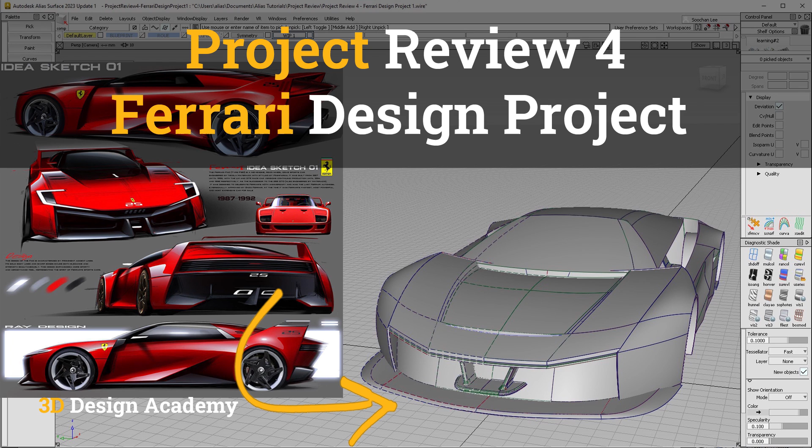In this video, I will be doing a project review and provide recommendations to improve the model. Now, this is the model that I'm going to be dissecting today. It is a project by a student. It is based on a sketch, so I'm guessing this is probably a student work. So let's dive into it.

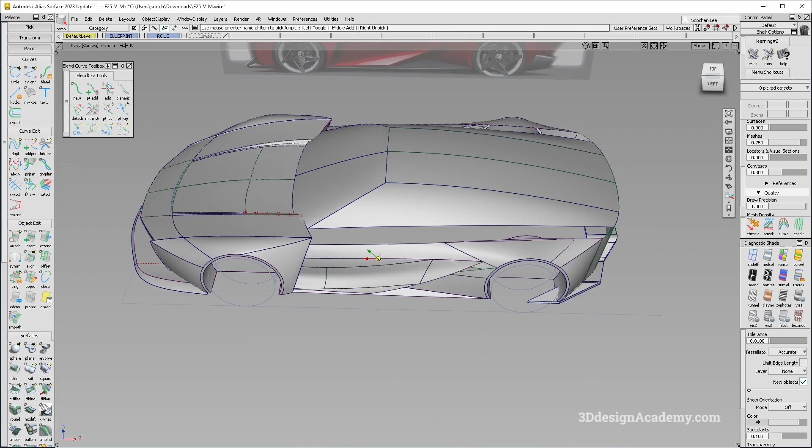Now, because this is actually not based on a production vehicle, I'm going to take some design liberties in order to improve it. The process is still very similar. You still want to clean up the surfaces, make sure that everything's good. So let's just go through it one by one.

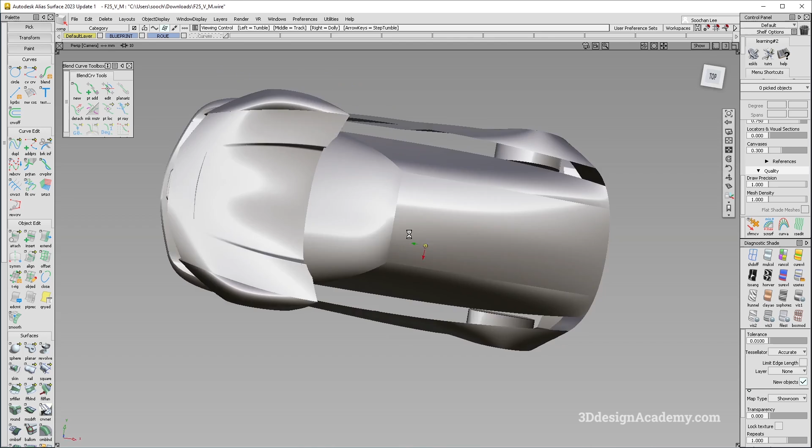Okay, so the first thing that I noticed is the reflection and the upper. So if you see this over here, you'll see that there's a slight peak over here, and also of course the windshield has a little bit of bump. So let's go ahead and fix that.

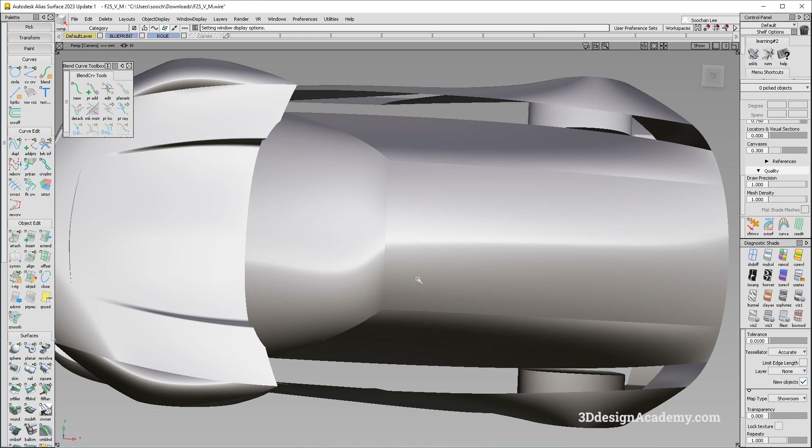Now when you're doing a model like this, you always want to build across the center, especially surfaces like these, because there are a couple of reasons. First of all, if you build across the center and you make sure that it's symmetrical, you're going to ensure that there's no peak in the middle. I mean, this one doesn't have a peak in the middle, which is good. And also, it's always going to be G3.

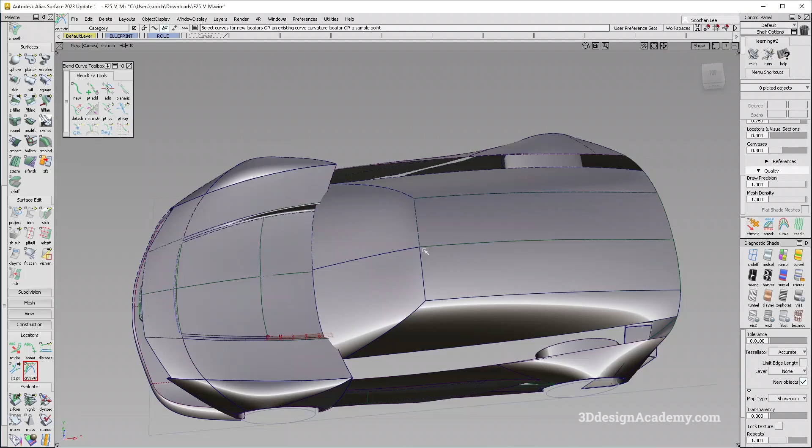Now, if I grab a curvature comb like this, you'll see that there is a little bit weird peak over here. And if you just click on this, yeah, there's something going on. So you always want to build across the center. So let's go ahead and do that. So what I'm going to do is I'm going to actually try to extract some curves. I do have a curve layer, so let's see if I can just use this.

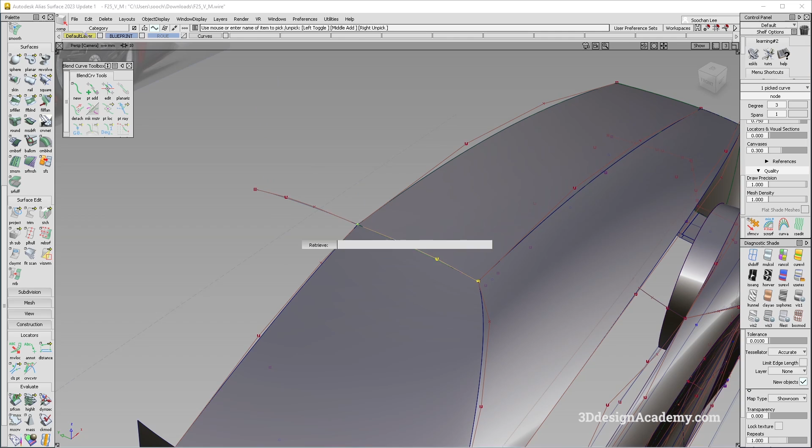All right, so the first thing I'm going to do is turn the symmetry off because it's kind of hard to build with symmetry on. And let's actually turn that off over here. I'm going to try to keep the footprint very similar, but I'm going to make some adjustments. So I'm just going to mirror this over here. And actually, I'm going to copy and paste this so that I don't mess with the original. Oh, actually, let me just do that again. So I'm just going to duplicate mirror.

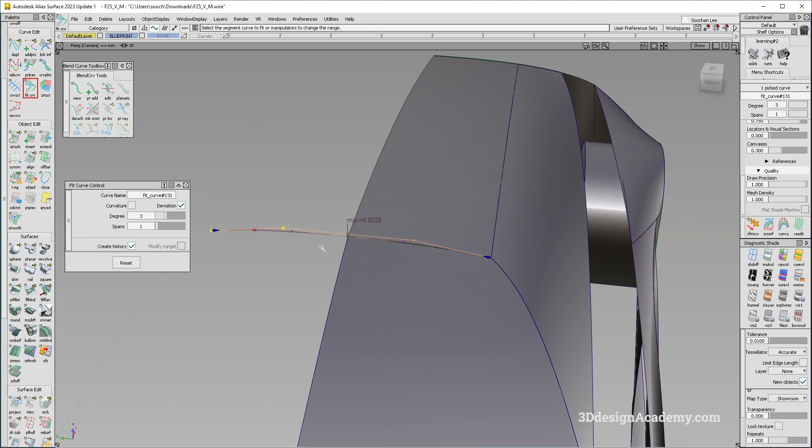And what I'm going to do is I'm just going to connect. So I'm going to say attach, connect like this. I'm going to pick here and pick here the curve like this. History, I don't care. Now I'm going to do a fit curve, and when you're doing a fit curve, if it's going across the center, you probably want to do 3. That's my recommendation. Of course, the CV structure, I think it looks a lot better. So I'm going to take that.

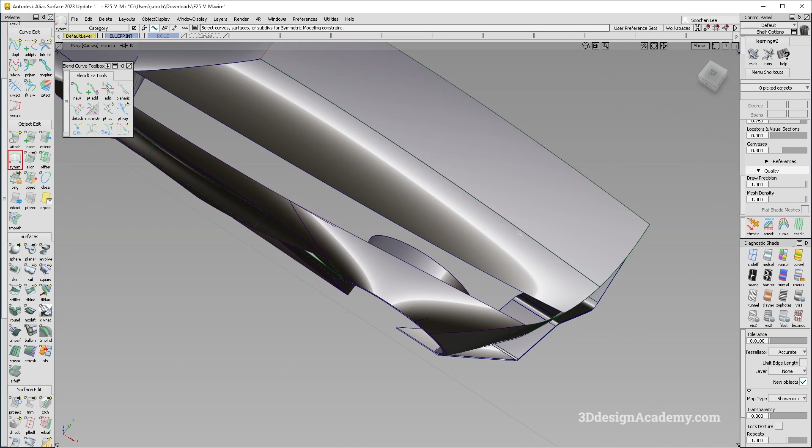Okay, so I have a curve at the top like this, and I'm just going to make sure that it's symmetrical like this. And let's go ahead and do the same thing over here. Okay, so it looks like there's no curve there. All right. So since I already have a footprint, I'm just going to duplicate some of these like this. Now, if it was like a fresh build, I would use skin, but since I already have the footprint or the surface patches sort of made, I'm just going to recycle them.

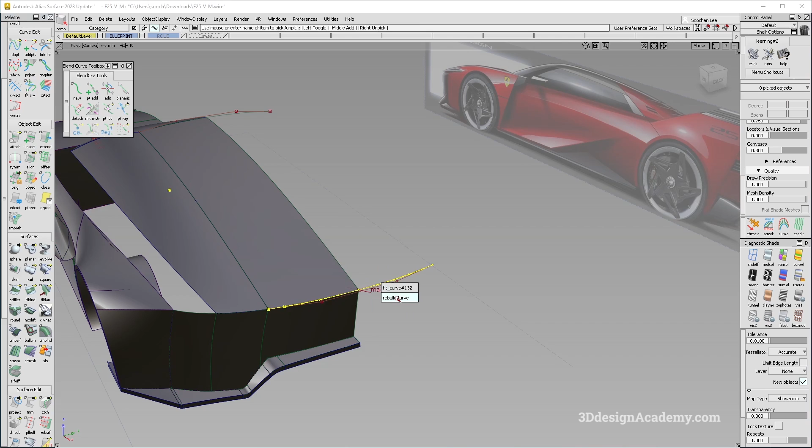So again, I'm just going to duplicate this one. Oh, looks like there's an extra curve. I don't know why. So let's get rid of that. And again, I'm just going to do a fit curve like this, and that's good. Because it is a fit curve, it is not 100% positional, but that's okay. And now I'm just going to duplicate this edge. Actually, there should be a curve, so let me just extract this. So I'm going to copy and paste, put in the default layer, and just hide that.

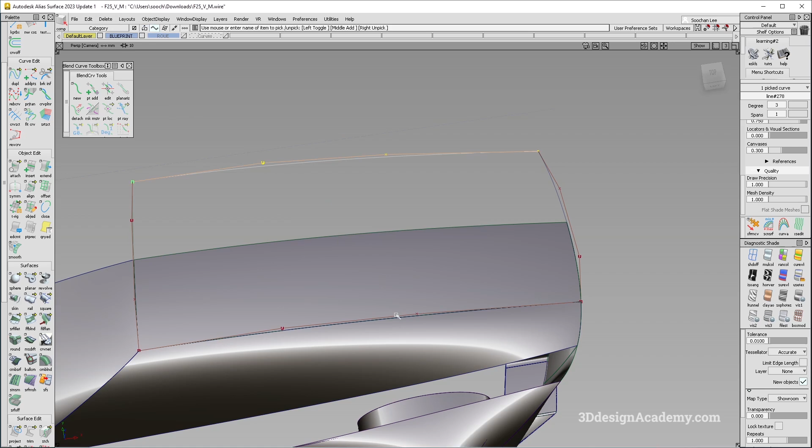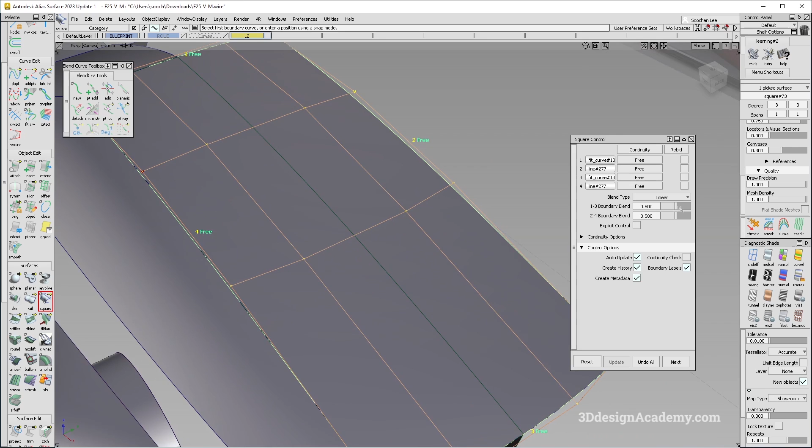And of course, you can just duplicate it over to the other side, or you can also put in a symmetry layer like this, and you should be able to make a square with that. So I'm just going to go ahead and make a square: 1, 2, 3, and 4 like this. And I think that looks much better. Now, if you're concerned about the height, there are a couple of things you can do. You can probably play around with the boundary blend a little bit, or you can just leave it as is. Just turn patch precision on like this.

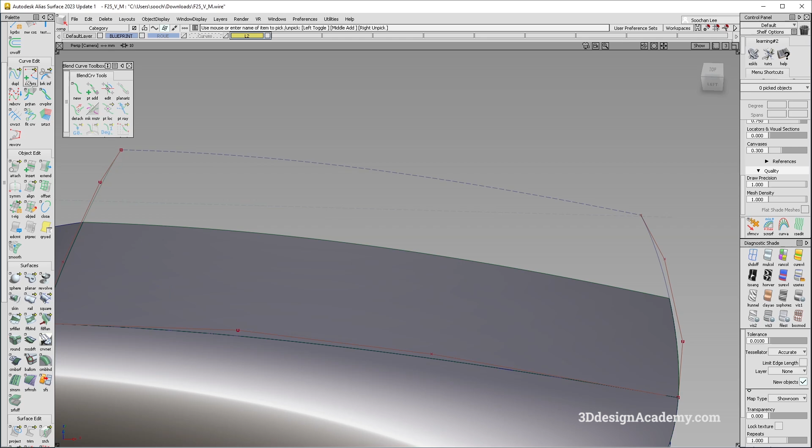And you can just grab the CVs like this and just pull them up and just make it similar. Now, if you don't like that and you want a precise section, what you can do is you can also duplicate this curve over here. Actually, you know what? I do believe I have a curve there. So let me just copy and paste like this. I'm just going to put it over here. Oh, symmetry should be on.

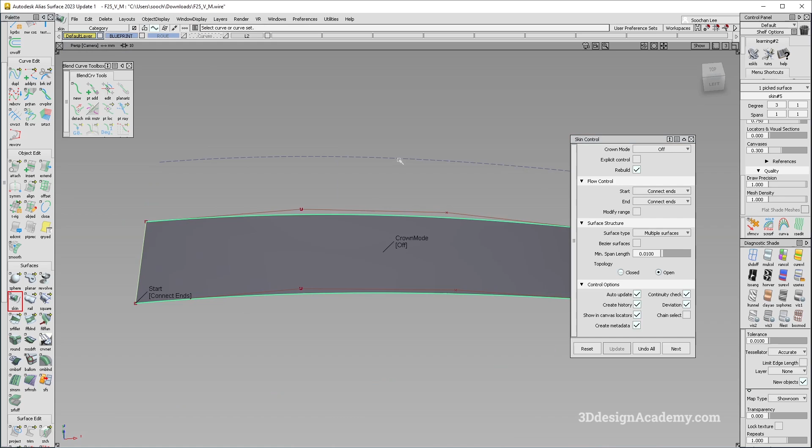And let's just turn the curves layer off, and I'm just going to grab these, and you can always use a skin. So I'm just going to click here, shift click here like this and like that. Now that's going to ensure that this section is exactly as you commanded. If you look at it from the side view, the placement should be exactly the same. So that's the beauty of using skin. So if you project this over here, there is no gap between the two.

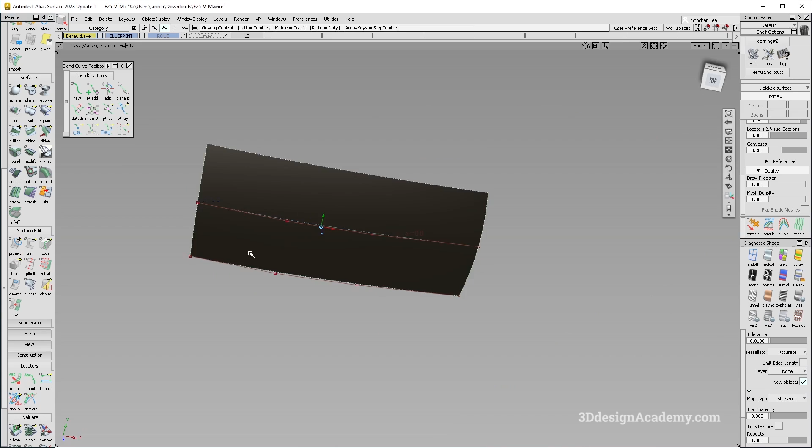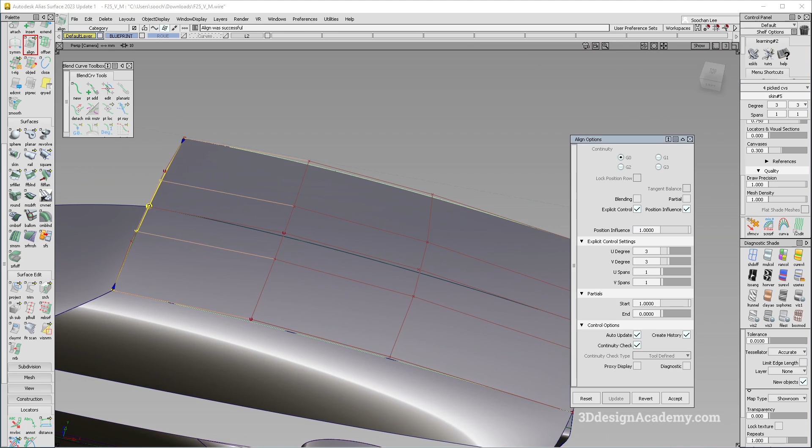Now, of course, the problem is this is good for making this, but it doesn't really follow the section. So one thing you can do is once you have this like this, you can, of course, delete the construction history over here, make this into a degree 3, and you can align. So I'm just going to align this one like that. Over here, you can increase the position influence to max like this. And of course, you can just turn on blending. I would say for this one, I'm just going to do explicit degree of 3, blend factor of 0, like this. And actually, you know what? That's pretty close. If it's not exact, that's okay.

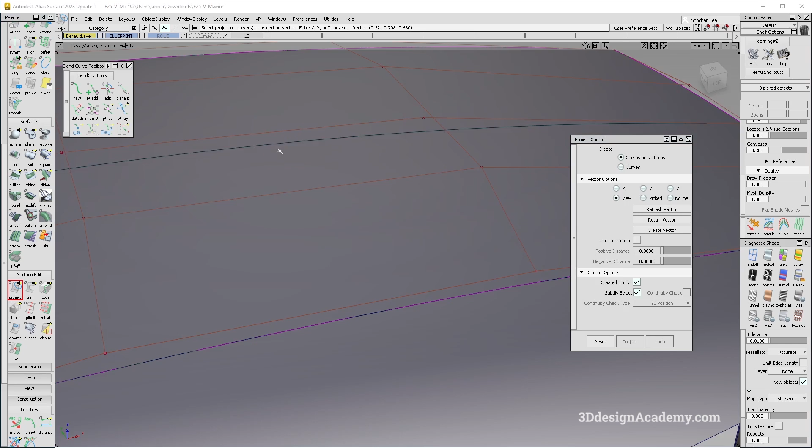Now with this one, you should be still able to keep the center section as is because I didn't really move anything. So if I were to project Z, okay, maybe I did. But still a lot closer than before. If you want to make final adjustments, that's good too. All right, so now that's done. I'm just going to delete the construction history, and I'm going to go ahead and do the same thing over here. I'm just going to align this one.

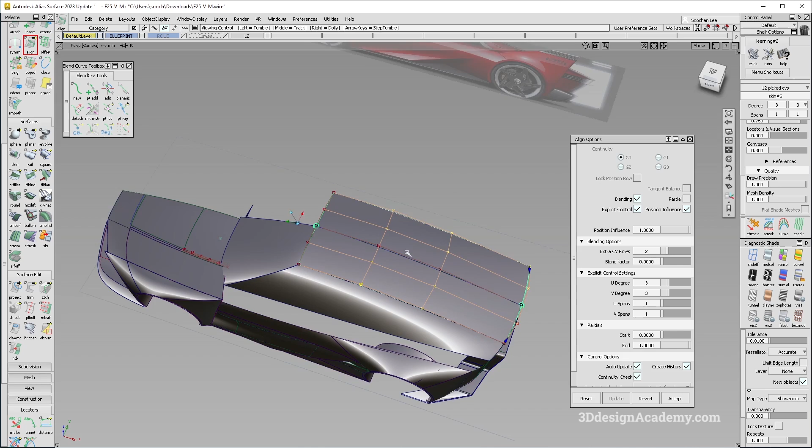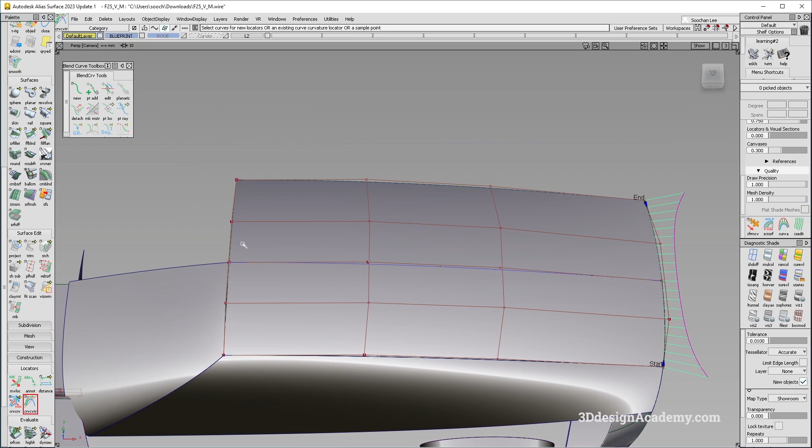But this time, I am going to set the extra CV rows of 2 because I already matched this one, so I don't want to move that. And I'm just going to change the blend factor to 1 so that whatever I do here, everything is gradually transitioning onto here. So as you can see, the highlight's a lot better. It's flowing a lot nicer. And the best thing is this is G3 across the center. So if I just check this one, as you can see, nice acceleration towards the end. And of course, it's smooth across the center, which is a lot better than before.

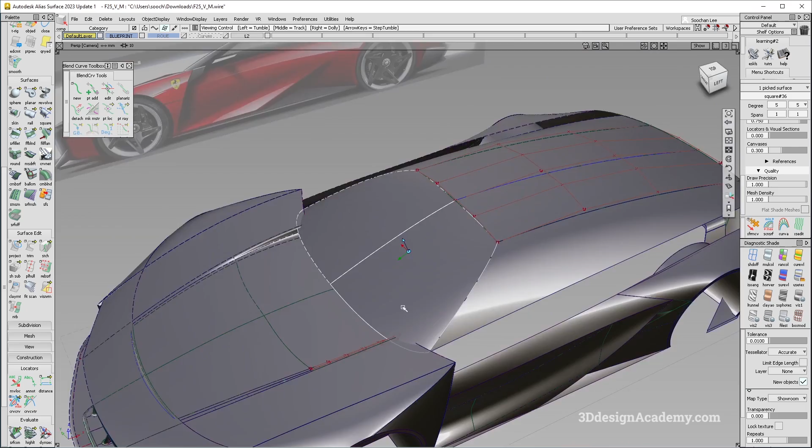Okay, so now that the roof is done, let's move on to the windshield. So if you look at the windshield over here, let me just turn symmetry on. You'll see that there's a little bit of a weird bump across there, and I think the acceleration towards the end is not exactly ideal. So I will probably fix that too. All right, so in order to do that, there's a couple of things you can do. You can use skin, you can make curves and make skin. That'll be one thing you can do. You can also make a square, maybe clean up the highlights a little bit. So maybe this time I'll use a square.

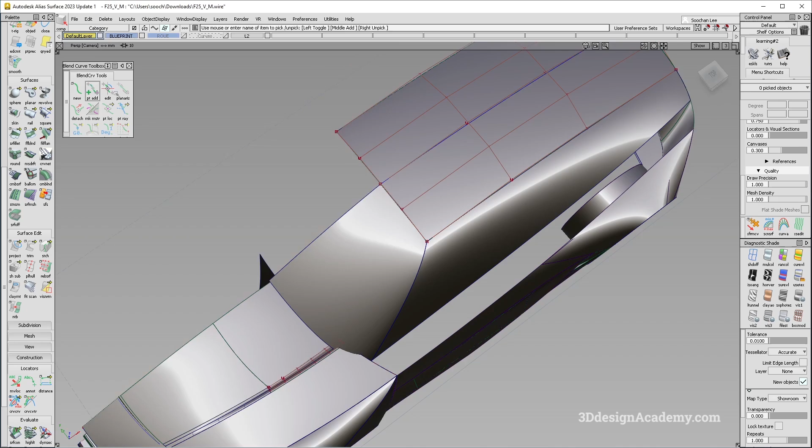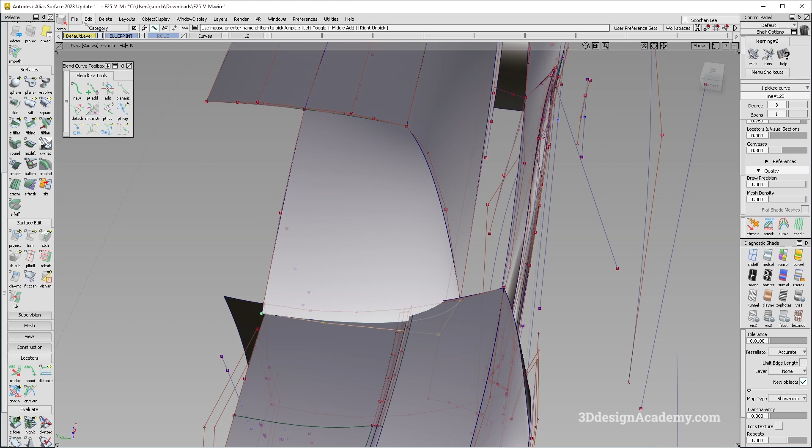All right, so the first thing I'm going to do is, actually, before I do anything, let me just turn the symmetry off. And if you look at the curves that the student made for the windshield, as you can see, I think the structure has a little bit too much acceleration towards the end. So what I'm going to do is, first of all, I'm just going to copy and paste, put it over here. Let's just make this into a symmetry layer. I'm going to duplicate it over to the other side. Oops. I don't know what I made, but that's okay.

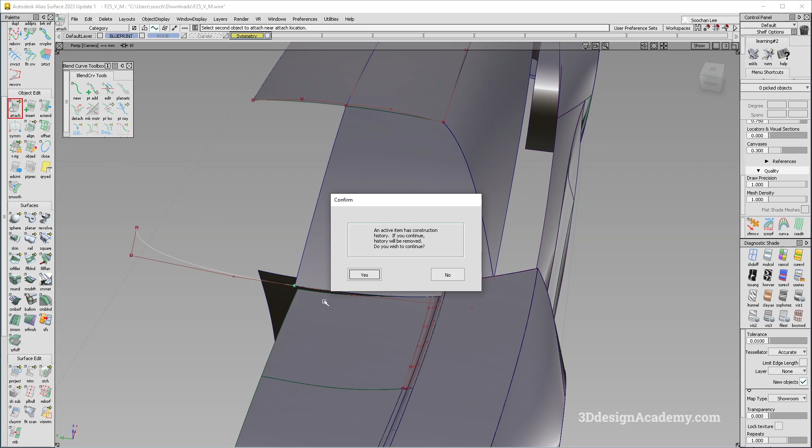Just going to grab this curve over here. I'm going to say edit, duplicate mirror onto the other side. And of course, I am going to do an attach. So connect. I'm going to grab this one, I'm going to grab this one over here like this. And I'm just going to do a symmetry.

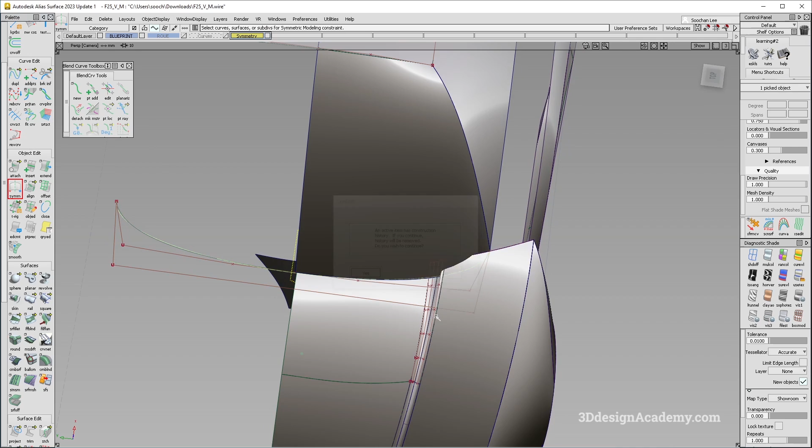Oh, not symmetry. My bad. I am just going to do a fit curve, and I'm going to make a degree 3. Of course, because this is actually trying to fit it over here, as you can see, the acceleration is quite severe, and the CV structure like this is not desired. So what I would do is I would actually turn on symmetric modeling like that, and I'm just going to push it towards the center so that it's somewhat gradual like that.

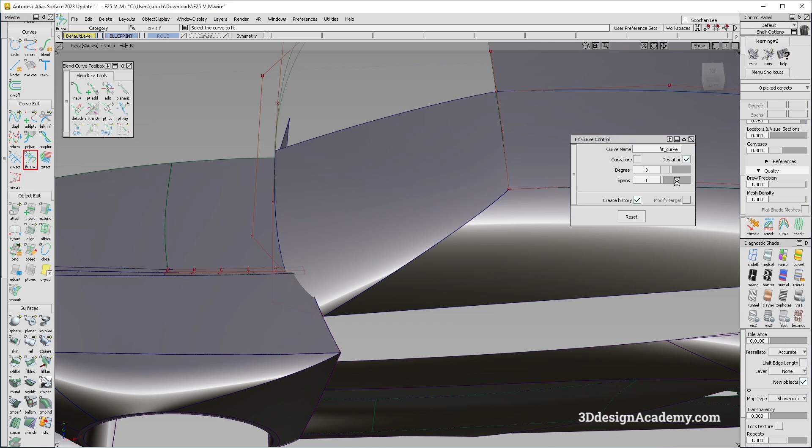All right, so that looks good, and this actually shouldn't have gone to the symmetry layer. Okay, so let's just go ahead and also extract this one over here. So I'll probably just do a fit curve like this, and instead of making it 3, I'm just going to make it degree 2. And I would actually prefer this to be somewhat centered so that it's got a nice linear shape. And I am going to put this in the symmetry layer so that I can use a square. So let's go ahead and do that.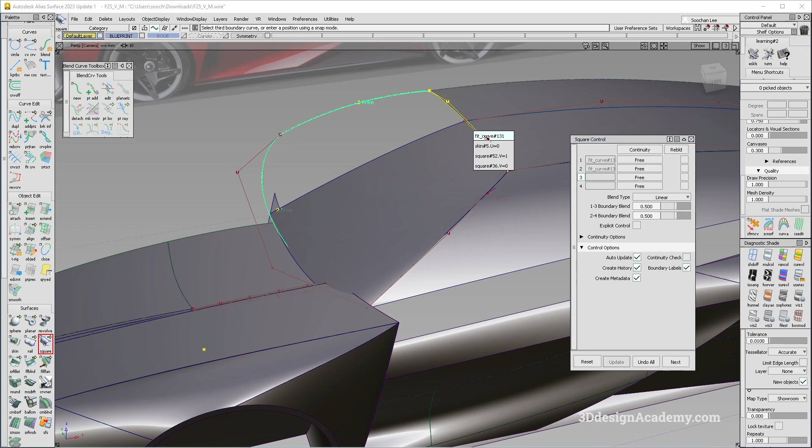So let's delete this one because I don't like the structure of that. So I can use a square. So it's going to be 1, 2, 3 over here, and 4 against this curve over here. Of course, because the structure is a little bit different, as you can see, it's going to have a little bit different volume, which is fine because you want to make sure that the surface structure is good.

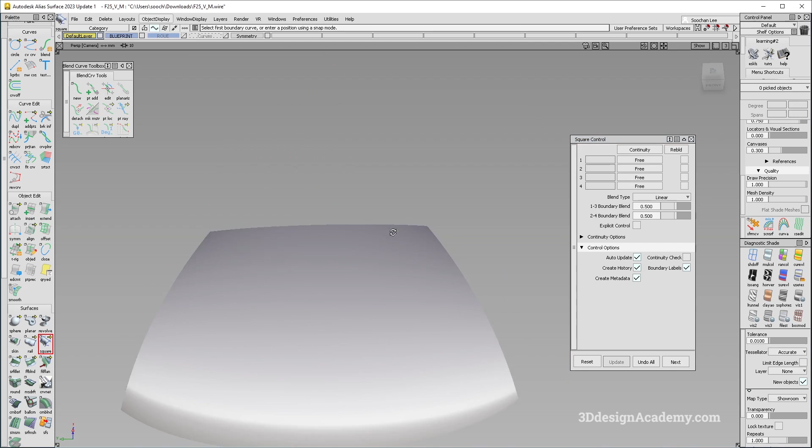Now, however, if you look at this, it's going to have a little bit of a flat spot. Well, actually, it's not a flat spot. I think it might be a little bit too much acceleration. I would actually pull this up a little bit. So if I were to just copy and paste this over here, and let's go ahead and do a symmetric modeling on this one, I would actually pull this up a little bit.

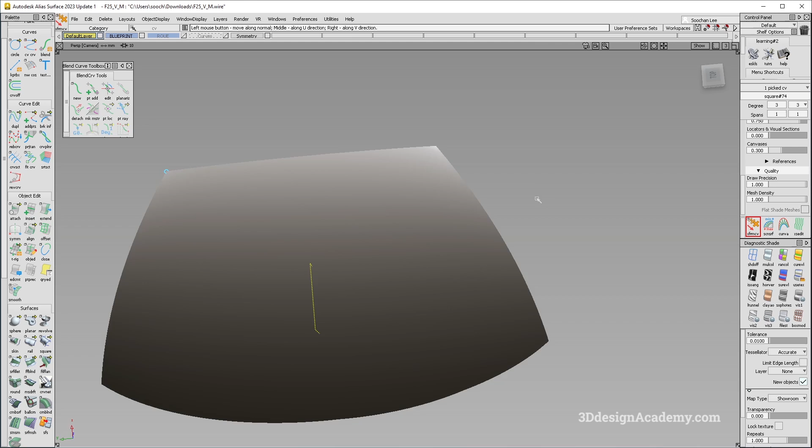So if I were to pull this up, actually mouse sensitivity 50. If you look at the highlight over here, it's potato chipping. So you just want to pull it up, and that's going to make it a little bit more gradual like this. I'll prefer that. Actually, because of the shape over here, I think square might not be the best tool. So let's do this. I'm just going to delete this one. I think part of the reason is because this is flat over here.

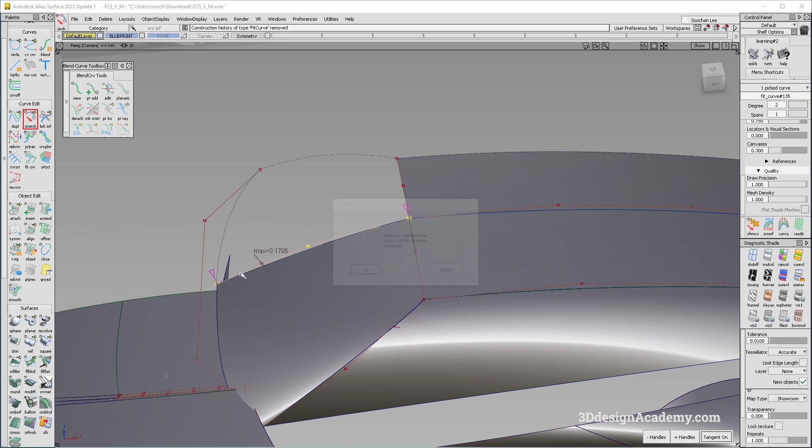So if you have a shape like this, another thing you can do is you can also do a bi-rail. So I can just duplicate this. Oh, actually, you know what? Let's do a fit curve. And you can use the stretch tool over here. Snap it here like this, and you can do a bi-rail. Like that. Oh, why? Oh, okay. So it looks like the position is a little bit off. So let me just update that. Oh, that's why.

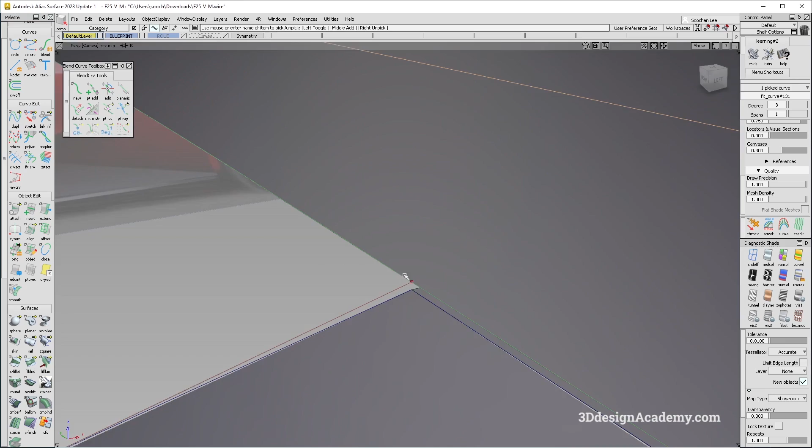So that's why the position was off. Because I did a fit curve on this one, I think that might have moved the surfaces a little bit, which is okay. All right, so I'm just going to delete the original over here, and go ahead and do a bi-rail like this. Now, bi-rail is actually probably not the best method, but still, if you want to keep the center section as is, that's something you can do. Of course, the only problem with the bi-rail is because it adds a span in the middle, it's going to give you something like that.

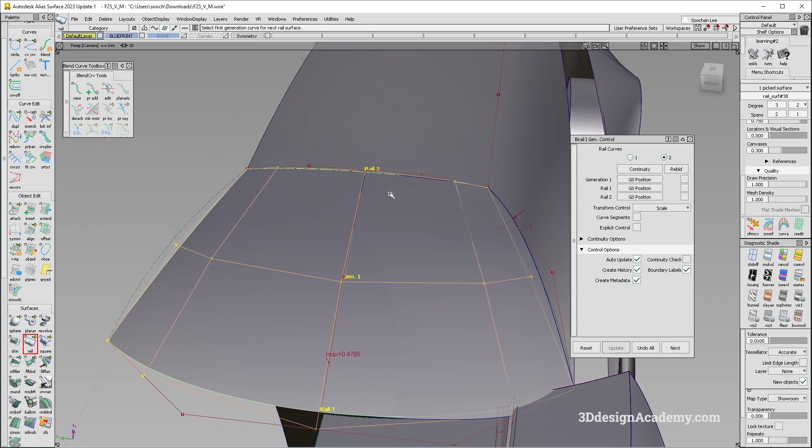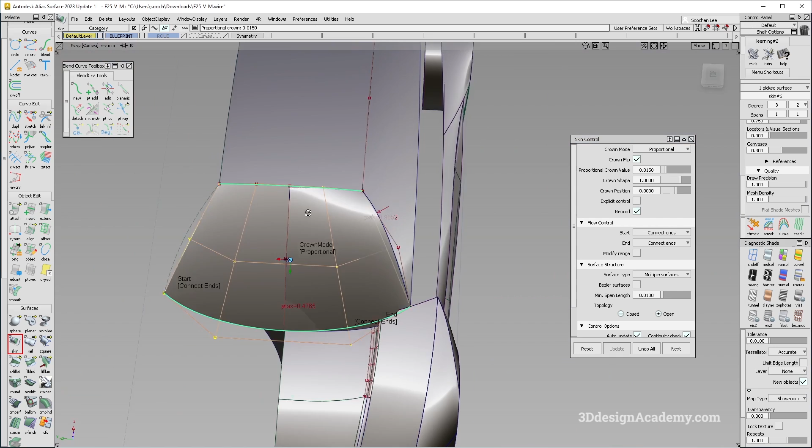Of course, another thing you can do is you can use a skin like this and just add a little bit of crown. Let's see, I'm just going to give it a little bit of crown, proportional crown, and you can just roughly match it to whatever the center section has. I think the acceleration over here might be a little bit too much compared to the front. I think that's why it's giving me a highlight like this, but it's still looking a lot better than before. So that's something you can do.

Of course, you can do the same thing over here where you create a curve like this, curve here, and just do a skin. That's something you can do too. So, well, actually, let me give that a try too.

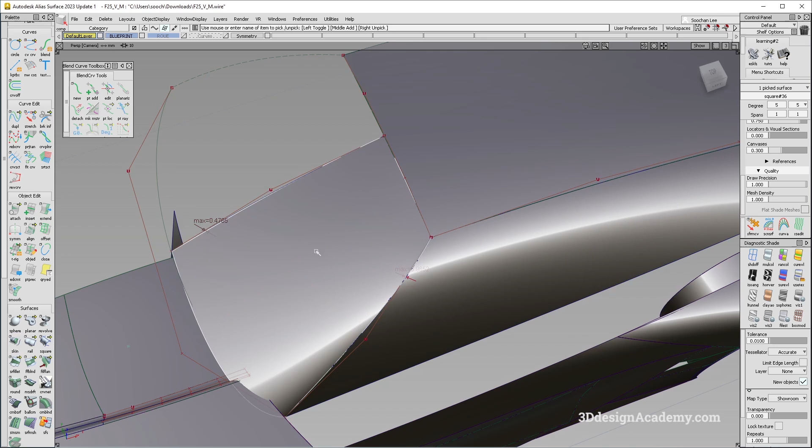So let's go ahead and use skin. So I'm going to grab this curve, shift click and click this one, and there it is. The only problem is, of course, it doesn't really fit the section over here, so you do have to update it. However, the highlight, maybe not the best. Okay, so let's give that a go.

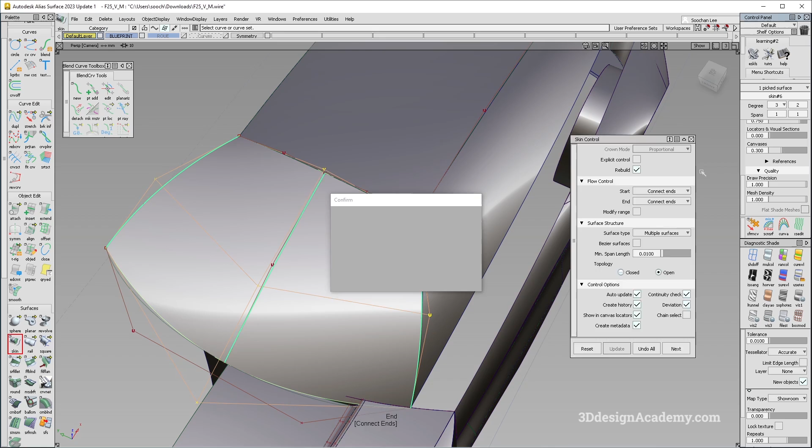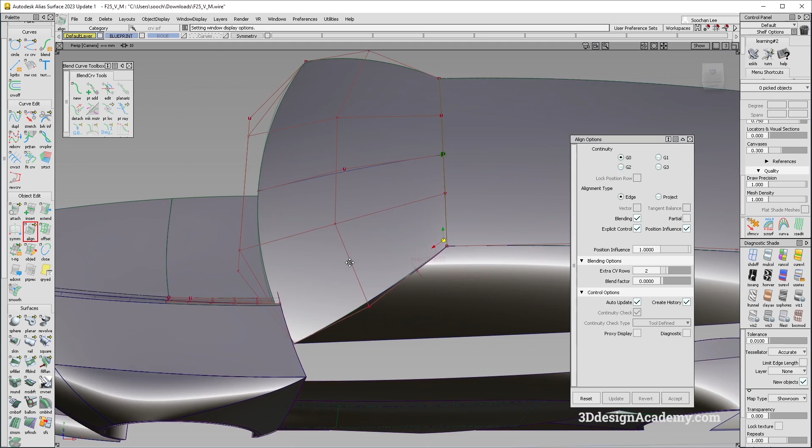So I'm just going to make it a degree 3 across here, and I'm just going to align this piece over here onto the curve like this, and this time I'm going to say blend factor of 0 like that, and it still has a flat spot, or I guess a little bit too much acceleration, so I think it really needs to be adjusted a little bit. So one thing you can do is you can probably just pull this one over here.

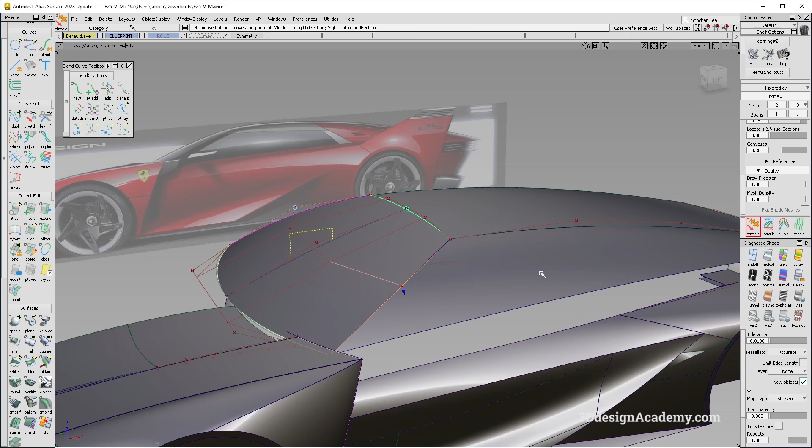So I'm just going to turn symmetry on. I think this needs to be pulled back a little bit. So what I'm going to do is, actually, let's do NUV. So I'm just going to grab NUV and I'm just going to pull this down like that. And as you can see over here, that also helps with the little bit too much acceleration that I have on this one.

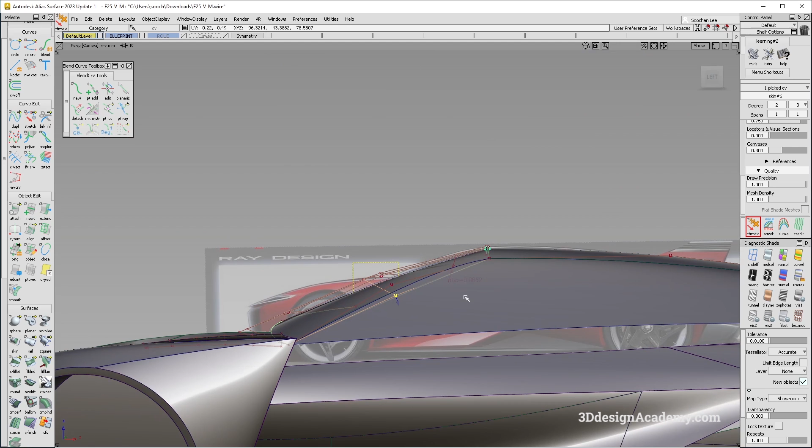So that is something you can do, and of course the highlight is flowing a lot better through the center. So yeah, overall much better. But I just don't like the amount of volume that this surface has. So probably I will just push this one a little bit towards the center, something like that. And this one maybe do something like that so that the CV structure is a little bit better. Yeah, I think that's working out a little bit better than before.

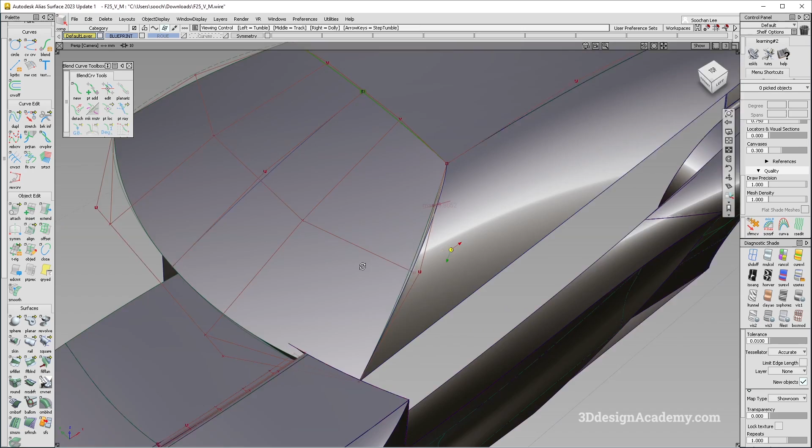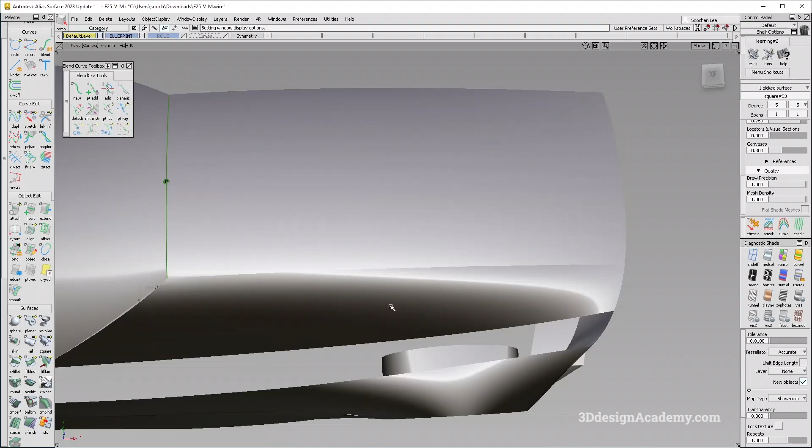Okay, and of course, let's move on to the side glass. Now if you want to keep the side glass as is, like this, that is totally fine. But I do think that it is a little bit too much volume. And of course, if you look towards the end, it has a peak and goes into a reverse peak over here. Professional term for this is a baby's butt, because it kind of looks like a butt over here.

Usually that's not desired. Of course, it really depends on the design. If this is something that was intended, you can keep it. But if it's not, then you do have to fix it. All right. The windshield, I'll just leave it. I mean, it is what it is. So I'll just leave it like this. However, I'm going to fix this.

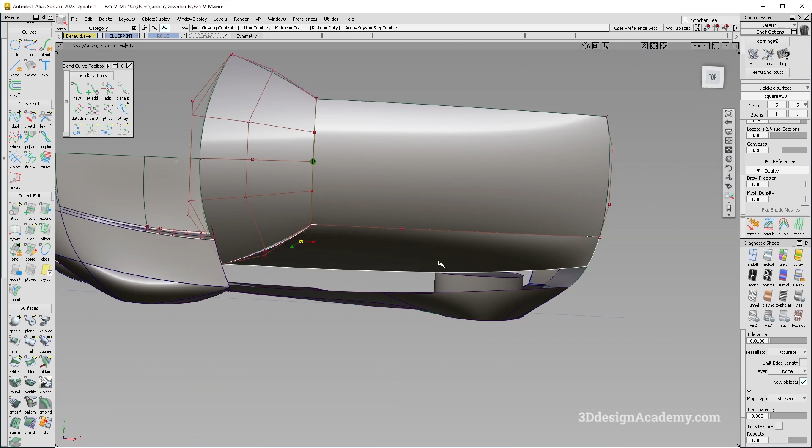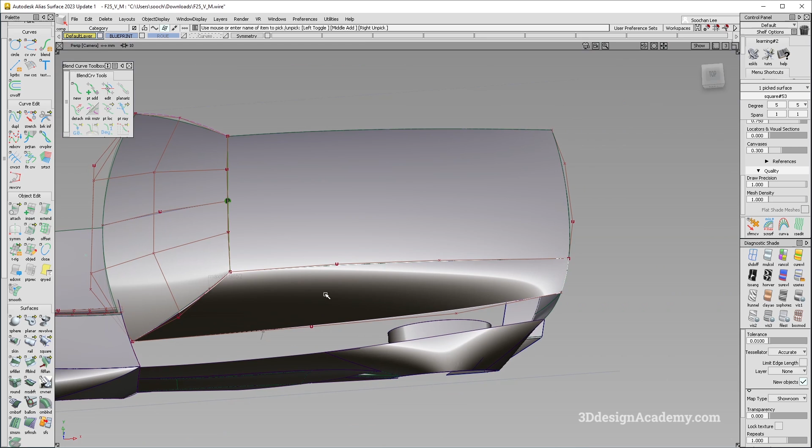Now, if you want to keep the profile as is, what I would do is maybe just do a degree 2 curve over here. Actually, you know what? Let's make it a degree 3 because it's degree 3 up here as well. Now, I think the CV structure is pretty complementary, which is nice. However, I think this does need to be fixed. So I'm just going to delete this one over here, and I am going to flatten it a little bit to match this one over here.

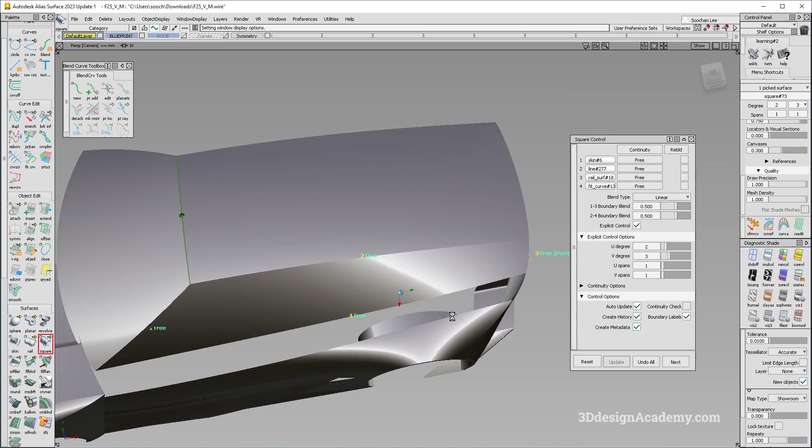So let's go ahead and do a square. So it's going to 1, 2, 3, and 4 like this. And I'm just going to reduce the amount of degrees. Let's do 2 and 3 to keep it minimal. Now, if it's a student project, having a side glass like this is totally fine because, well, the window doesn't need to go down. But if it's not, let me show you this too.

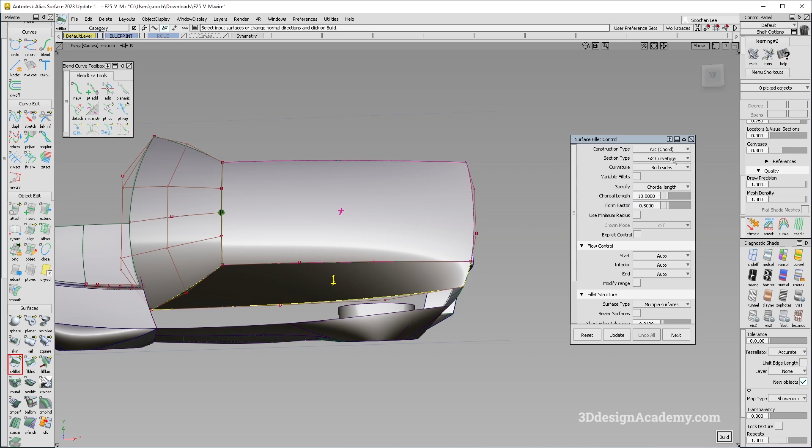If you want to just keep it like that, and if you want this nice, soft transition over here, you can always put a fillet like this. So I would say chord, it's going to be G2. Let's see. I would say existing theoretical is probably better just because it flattens out as it goes towards the rear. So I would say maybe 200. Form factor, I'm going to leave it at 1 just to make it a little bit simple. And just build it. Why doesn't it build?

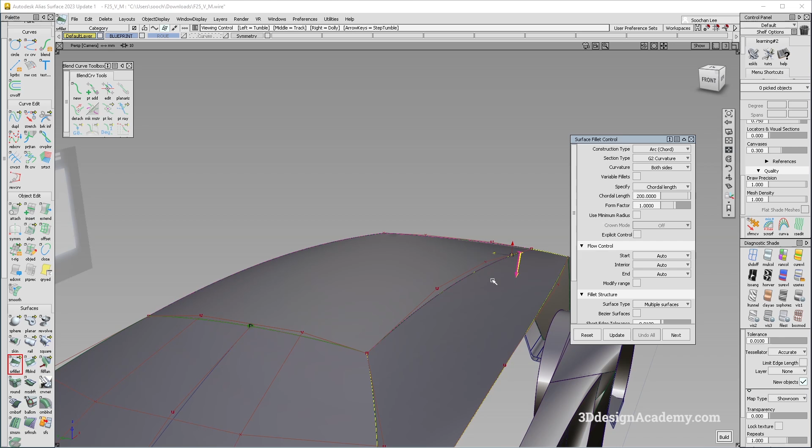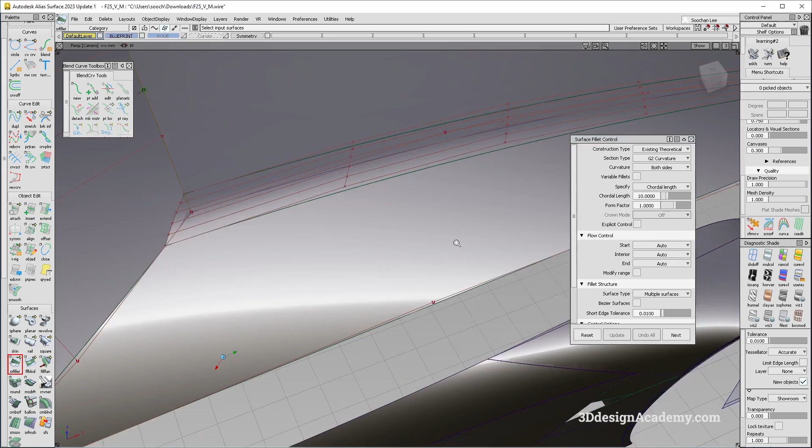I wonder if it has anything to do with this being flat, but that's what existing theoretical should be for. Maybe it's too big. Okay, I know why. This model is actually really small. I thought it was big, but if you look at the grid, okay, so that's why. I just made my fillet a little bit too big. Okay, so for this one, I would say edge align on the top. Edge align here. And I think everything's a lot more controlled and looks a lot better.

Now, if you want to make this a production surface, however, let me just copy this and just put it as a whip.

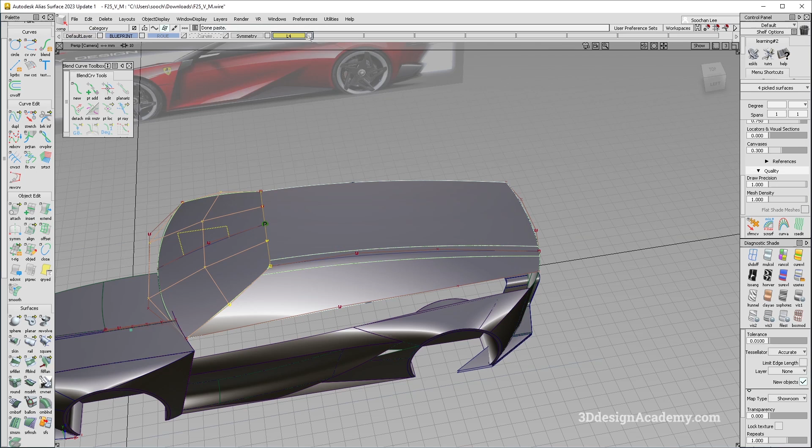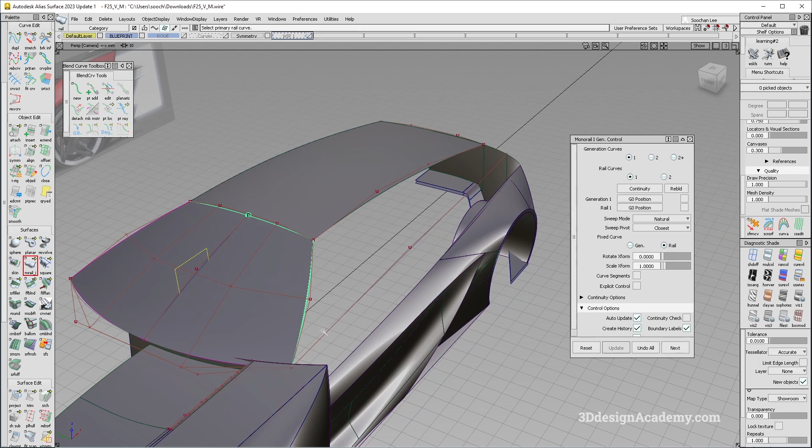If it is a production surface, however, there are certain things that you have to do. The windows do need to roll down, so you should actually technically make a barrel. Of course, making a barrel makes it a little bit more difficult. So what I would actually do is, if you're just trying to make a visual model, what you can do is you can just do a rail like this.

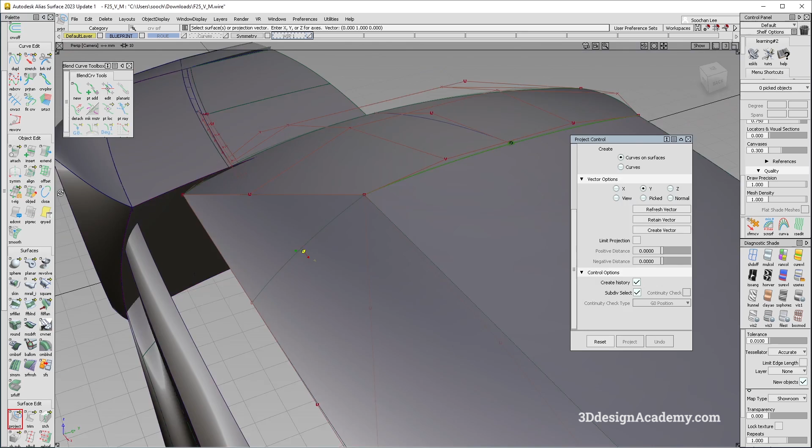And what it does, especially if you make it, actually, no, that's parallel, no. Well, actually, you know what? Let's do this. I am going to just make a curve like that. I'm just going to project it from the side, and that's going to allow me to extract the curve over here. I'm just going to do a fit curve, and I would actually make it 2 degrees. And I'm going to actually center it over here, like that. And let's go ahead and put this over here.

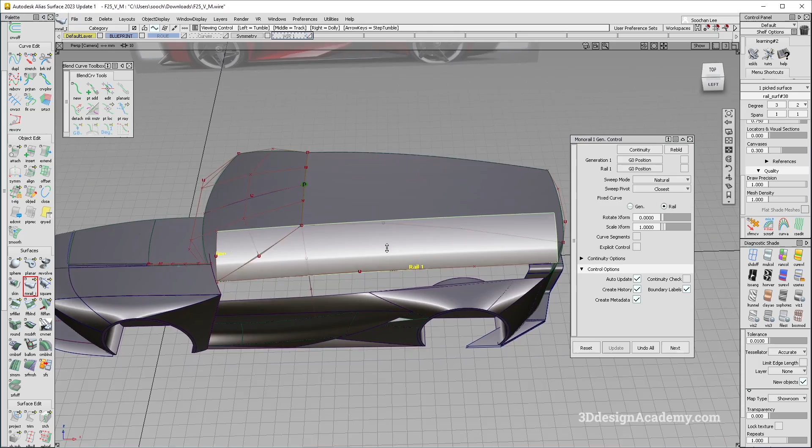Like this. And I'm going to just do a monorail. It's going to parallel. What that does is it allows me to create a very nicely flowing surface. It's not a barrel, but it's pretty close. So what you can do is you can just extend this one over here like that, and you can just extend this one over here. Actually, you know what? Let's make it symmetrical.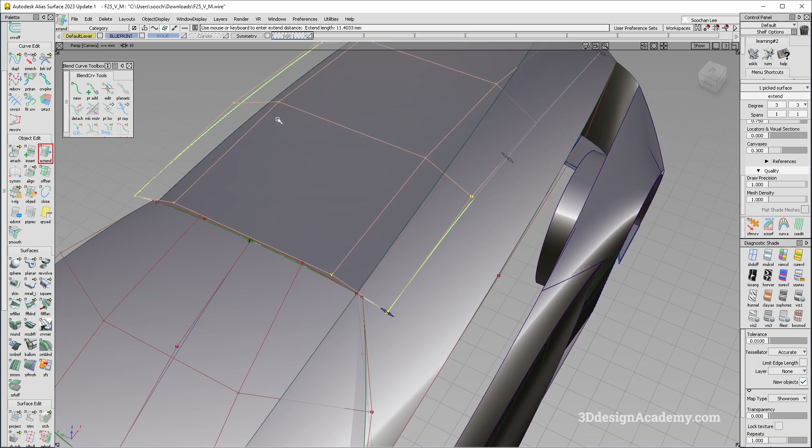So I'm just going to go ahead and, well, the symmetry is on, and let's just go ahead and extend this one outboard so that... Oh, well, here's a problem. If you look at this, this surface I think is diving down a little bit too much, so maybe this doesn't work well. So let me just show you as a demonstration. If I were to make this, I'm just going to make it into degree 2 this way. And let's hide this for a second, and just extend it like this, and I'm just going to trim it.

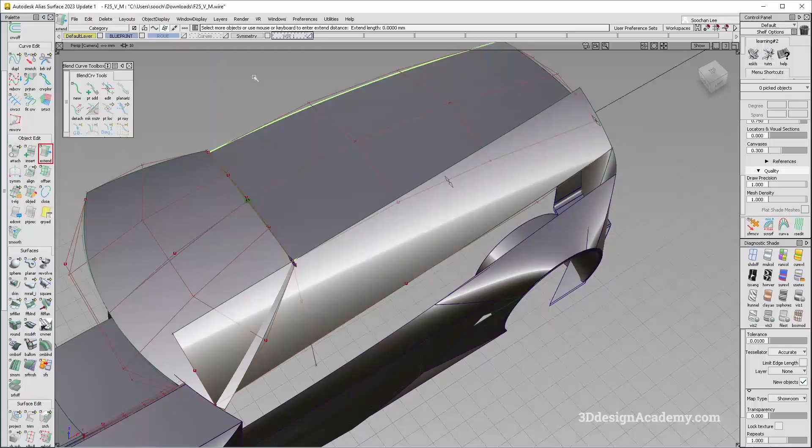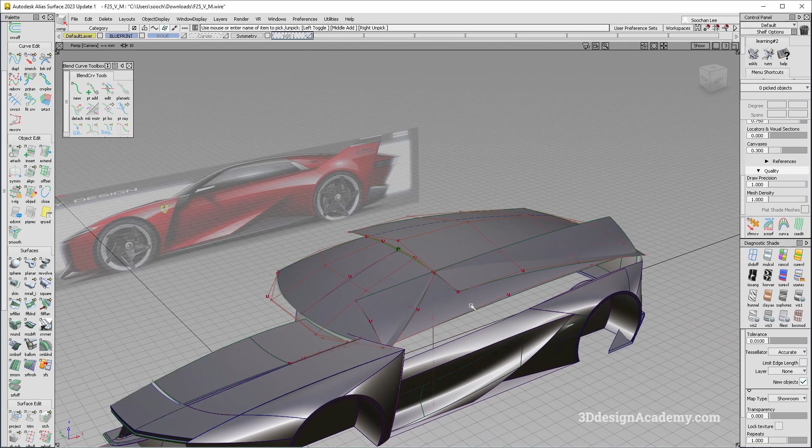Now, of course, the problem is for student projects, the window doesn't really have to roll down, and sometimes the design is a little bit more liberal. And as you can see over here, the side glass is very leaned down like this in order to make the proportion very nice and slim, because low and wide gives you a nice proportion. That's why sports cars, well, it's partly due to aerodynamics, but it also has a nice proportion too.

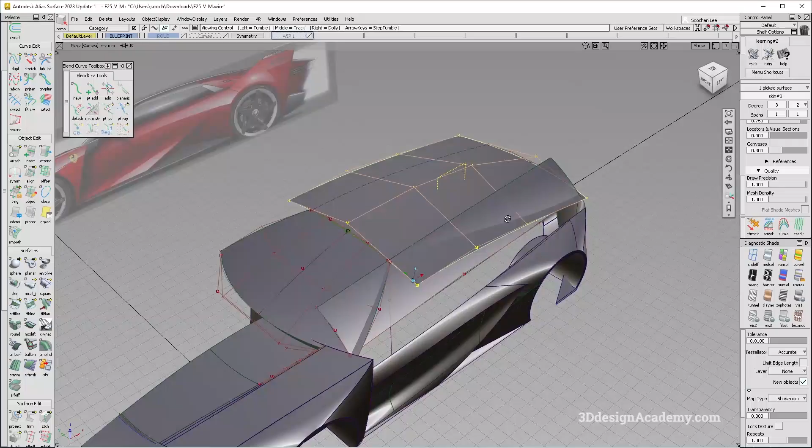So I think this method is part of the reason why production cars look the way they do. Obviously, it doesn't really work for a design project like this. So let's actually go back to the width over here. This one I'm going to go ahead and just delete. All right, so let's get those back. And I think this is probably a better way of setting up the roof, which has a nice highlight going through the middle. The curvature combs look good, and the acceleration over here doesn't look as extreme.

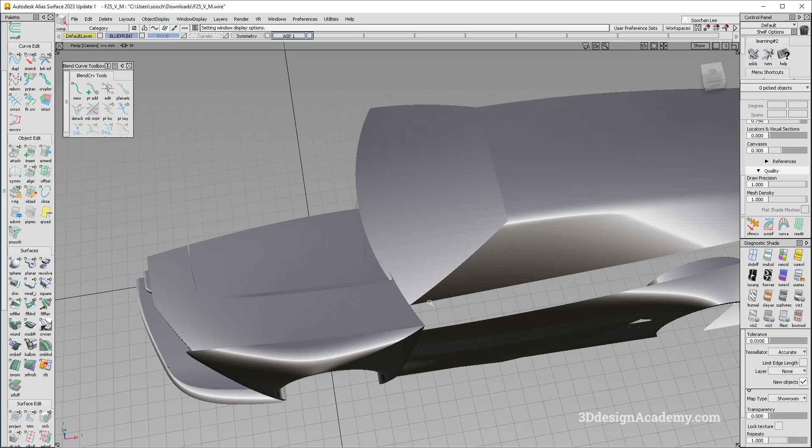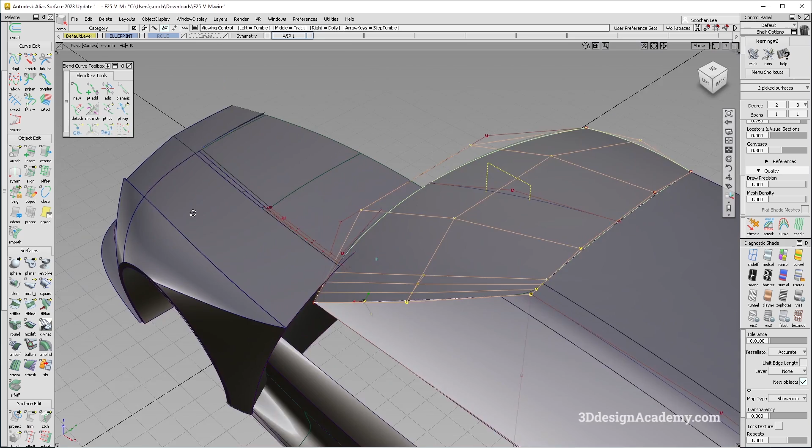Now, if you do want to give it a little bit of acceleration towards here, I would actually make this into 2 patches. So maybe I'll just do something like that. And I'm going to just trim convert this one, and trim that one over there. So now we got 2 patches like this, and I will duplicate this edge over here, and I'm going to just use the stretch tool. I'd preferably make this into 2 surfaces, instead of just making it out of 1. And I'll just do something like this, which gives you a little bit of acceleration towards the end. I think that's a more controlled way of doing this.

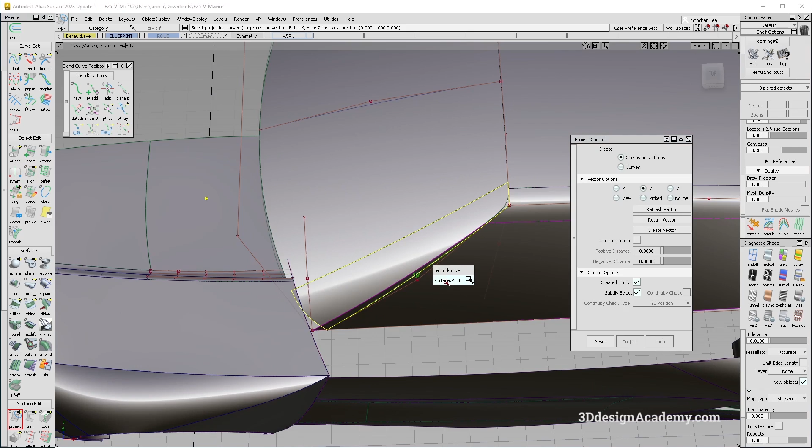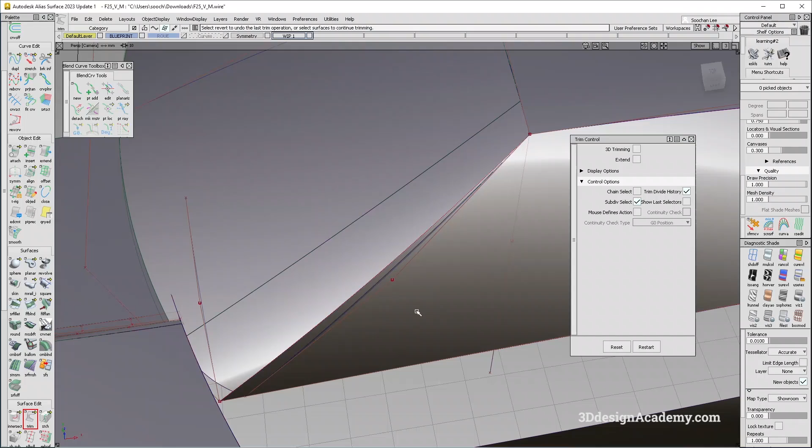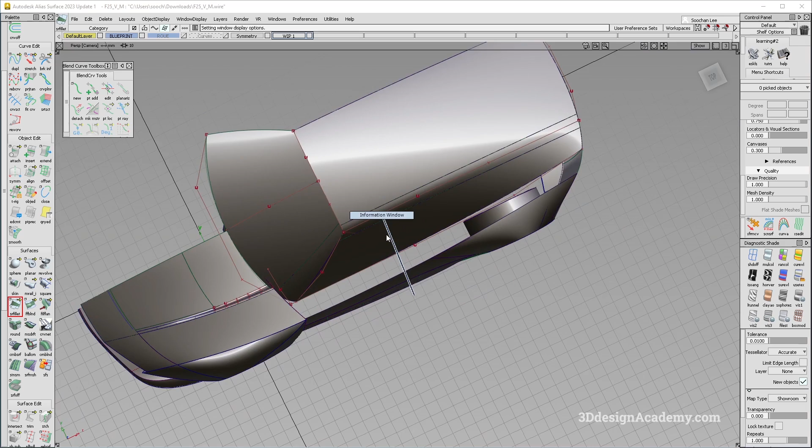Of course, it's not exact, so you can always just do an intersect and trim. Actually, you know what? Let's go ahead and do that. So let me just undo this, and I'm just going to extend this one just a little bit like that, and intersect it over here. I'm just going to trim over here and trim over here, and that gives you a nice acceleration towards the end if it is desired. And of course, you can just put the fillet back in here, 10 mils, and that's good. I'm going to go through the other surfaces as well, but for the first part, I think that's a pretty good cleanup right there.